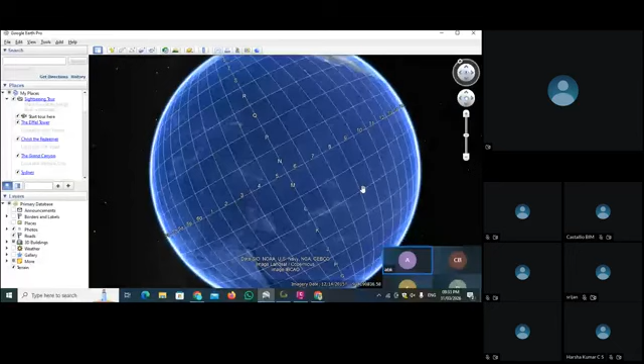So this is our Earth. I like the interface so much. As you work with whatever software, you have to like the interface first, then only will you work longer with the software. So today, what are we going to do? Actually, I made one demo project for you. Here we are going to work with an area.

First of all, let me show you the basic things here. See, when you open your Google Earth software, in the view tab you can see a grid line, or you can use Control L. If I close my grid, then you see the difference here. So make sure that your grid is on.

So we can properly manage our zones. Then there is one part here, you can see on your left hand side. We have to search the area whatever we are working on.

So today what we are going to explore is, like if I have one client requirement, as a client asks me that there is one area, one state highway passing from this end to this end, and I want to check the proper existing alignment. Because as I previously talked, there are two things: feasibility and the DPR report. So all these things are prepared for that work also.

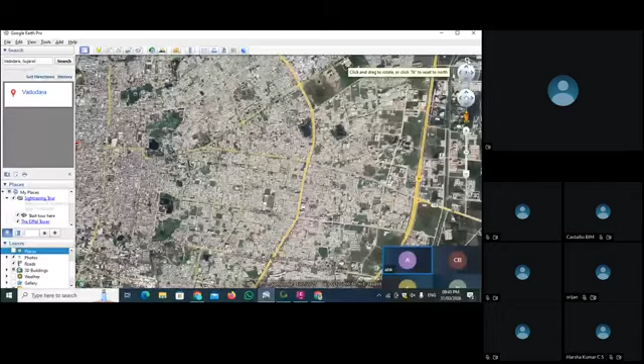We can adjust our eyes with the help of this button. If I click on the N button on the north side, it means the map is proper now. And if I want to explore from the top, I click this, and I can straighten the image with the help of this N button. So now I am properly on top. We can see this image exactly from the top.

Now what we do, we go deeper inside, go deeper inside, and again we adjust our scenario. See, now the first thing, we are using polygon.

If you have this area and you have to develop it, and you want to show the contour of this area, or the surface of this area, to the client, which is attached with this main road and this main road - how can we do that? For that, we can use this polygon. We have to click on this add polygon option.

Here you can see one pop-up. First of all, we have a description, so you can describe all the things you want. As you share this location to the client or your senior engineer, or whoever you give your work to, if your starting is proper and detailed, then in future while working on the same project you will face less problems.

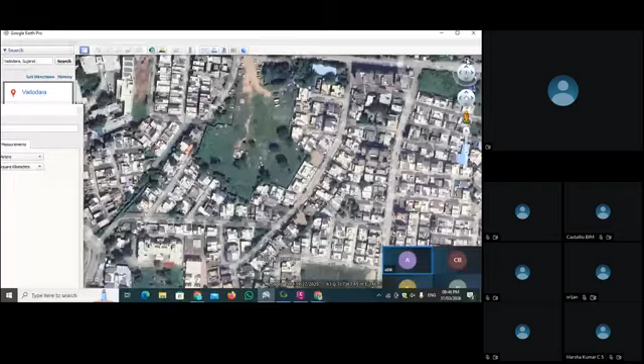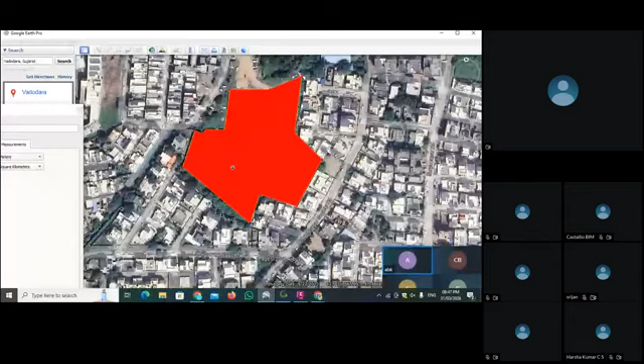See, I am clicking all the border area. You can see all that border line with the yellow color and your polygon in red color. Done. So roughly I identify the area that this is my exact area where I have to work.

Everything is automatically measured when you work with these things. If you want to add an image with this polygon, you can set the image here. You can share the local images taken personally from the location, you can share here. Also you can share a link if you want to share any link with this polygon, and then just click OK. As you click OK, you see your polygon is seen here.

Now what we do is export this polygon, save place as, and we have to understand that whatever file we save with the help of Google Earth, it is in a KMZ format. So for easiness, what I do is save it on the desktop and name the file as Vadodara area. It is in KMZ. Save.

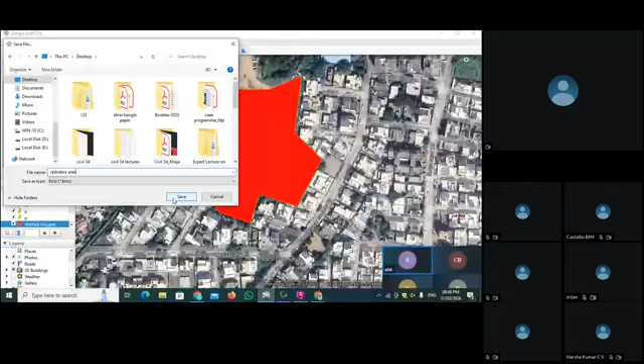See, we have this KMZ file named Vadodara area. Now we use Google Earth. First of all, why am I showing you this exercise? Because when we go to do another deep work, you'll understand the workflow. With the help of this, what we do is create a KMZ file.

Now we create a DEM. We give the elevation to this polygon. Whenever you start your working, make sure we have the zone 43Q. Then you go on Google Global Mapper.

Global Mapper is basically one tool. You can use this Global Mapper software if you want to add elevation, or there are lots of websites also for that. If you search in Google that you want to add elevation in your Google Earth KMZ file, there is online software too that you can use. But if you are new and don't know which software is trustworthy, make sure you use the Global Mapper only, since you are working in the field and know all the things.

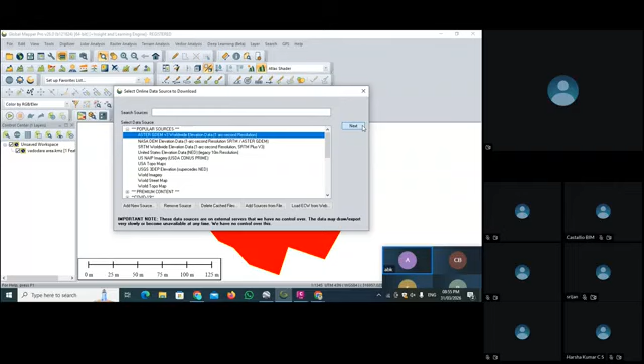See, now our polygon is connected with the data. Now what we do is export this file.

In an elevation grid format. See, there are lots of formats here, so as per your use, you have to select your format. Because I want to give the elevation, I have to select this as elevation grid format and click here, so I have to set it as DEM.

There are so many parts you can select. If you want to use any software after this - we are going to use Civil 3D - so we select DEM. In Civil 3D we have the option to create surface from the DEM. That's why we convert this into a DEM file.

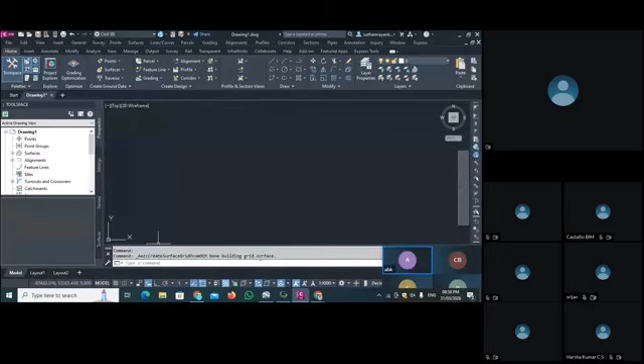Then we go for the surface, create surface from the DEM. On a desktop, we go to the Vadodara area DEM file and open it. As you open it, you can see the command bar. The importing of DEM is done, and it's building the grid surface.

Now our surface is imported, but we cannot see it on the screen yet. So to see it on screen, I talked about this yesterday. Z enter, E enter.

See, we import directly that contour part in the image. You can see all that, because we have a flat area, because we imported a flat area. So this is a flat area, so we can see our contour, these types. An experienced engineer understands the things at once.

Hello. If the contour line is... hello. Yes sir, one doubt is there actually. When you imported the DEM file, did it import only that polygon area or the entire window area of the Global Mapper? Okay, please turn off your mic, I will tell.

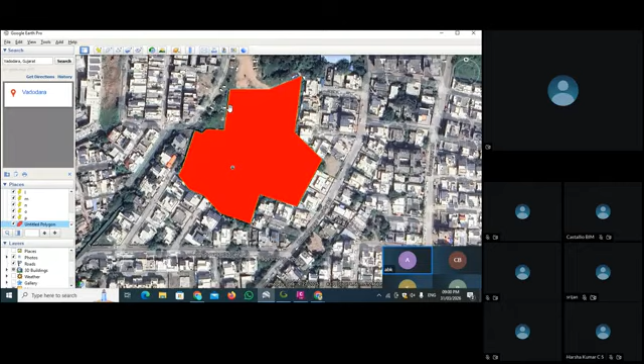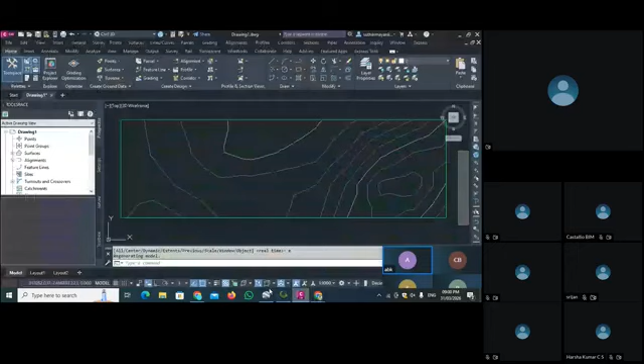See, when we imported the area, what did they do actually? What happened when we create in this part? So what happened here, we have another step, and we show here in Civil 3D. The work changes here because we give the terrain data with this polygon. So whatever you show here in between this screen, all this is imported here in the Civil 3D part. So your polygon is shown here in between. Now how to take this polygon, how to check that polygon, where exactly our polygon is.

So for that, today we are using that image method. This is just the flow that I want to show you. Now the next practice we are going to do is to exactly solve your questions, as we imported it as an image, and we check that image here in Civil 3D with the help of geolocation. So in Civil 3D itself, we take the whole Google Earth into Civil 3D, so whatever we selected in Google Earth, we exactly put it here in Civil 3D.

Okay, so let's start to solve your question. See, if you don't want to see this polygon, you have to turn off this tick, so your polygon goes off.

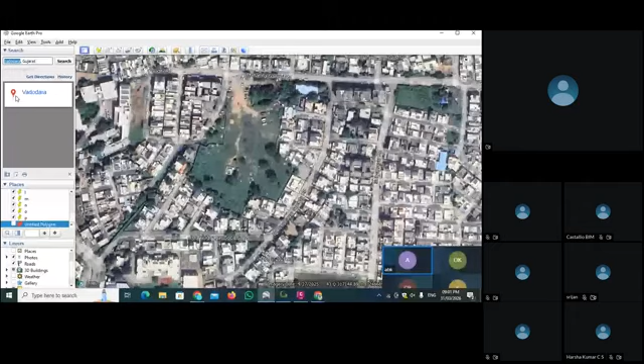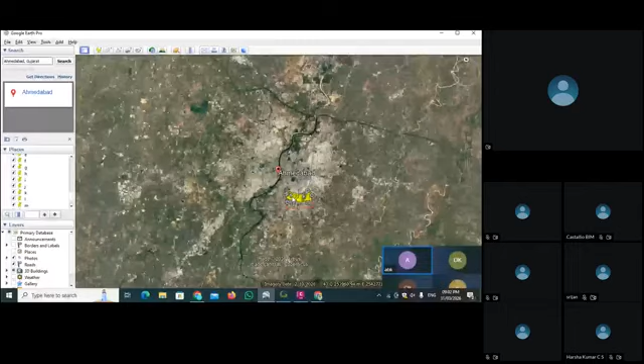Now I search the area, Ahmedabad, Gujarat. See, now what we did here, we take one part, and in that one part...

Just give me 1 minute, I have one call to attend. Give me 1 minute only.

So your untitled path is created. First of all, you have to save this untitled path with a name, Ahmedabad. So this border area will be saved. As a KMZ file, the Ahmedabad area will be saved, this border area.

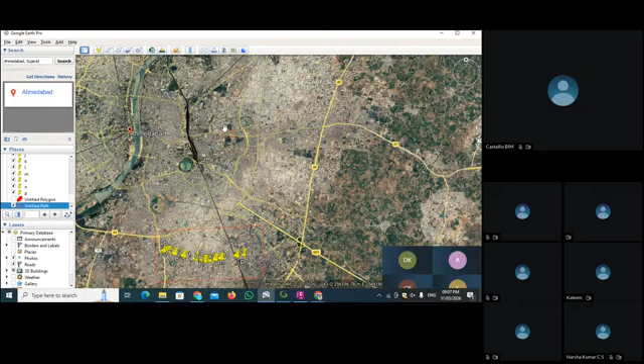Hello, actually your screen is not visible. I will share again. For me, the screen is blurry, I can see but it's not clear. There is some internet issue, I have already highlighted that around 20 minutes back, the screen is blur. Now we can see all attendees, but when you move the screen, the Google Earth is not clearly visible. I think your internet is causing the screen to go blur when you move it. It will happen sometimes because of the internet, but don't worry, when you get the recording all the things will be cleared. So now is it clear? Still blurred.

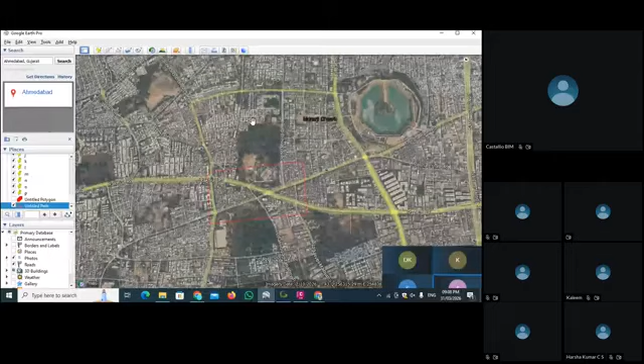So first of all, what we do is create this part and save it as a KMZ file. After saving the KMZ file, we have to take a reference of this road, so I want to export this road.

I use this place mark button. As I start the place mark, click on the add place mark button. You can see a place mark here. First of all, we have to give a name to this place mark. I will give the name as 1, and put it exactly at our road center.

Then we give place mark number 2. As this is a straight road, we give the place mark at a long distance. It is okay, but if you have a curve or that type of thing, you have to give the place mark at a smaller distance to create a proper alignment.

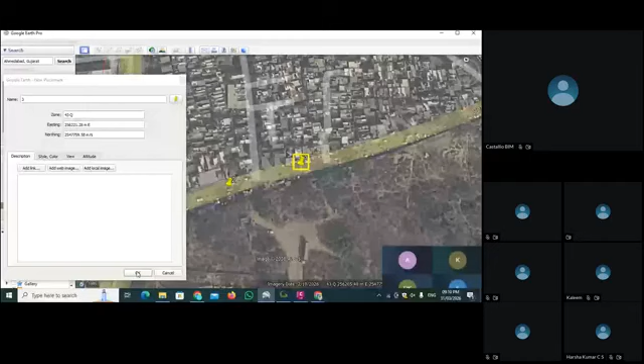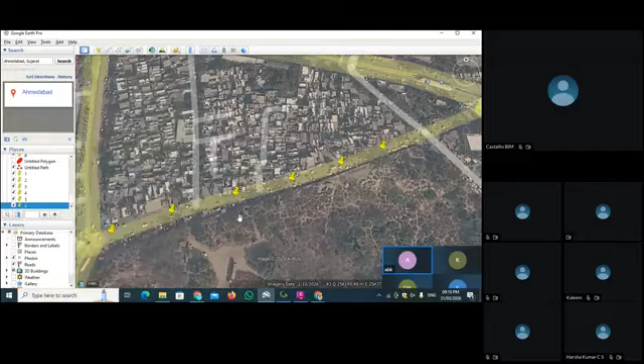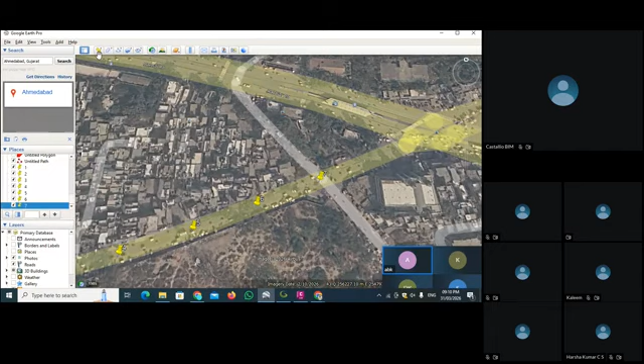Now we go for place mark number 4, then number 5, then number 6, then number 7, then number 8. Now we take a longer distance for place mark number 9, place mark number 10, and place mark number 11. Okay, done.

Now what we do is select one area, and in that area we take one road as a reference. Maybe this will be a road widening project, or they want to mark the road to see the existing alignment, or deliver the existing alignment data as per the proper location. So what we have to do is mark this area, select this button to make sure your screen is properly visible, and then save this part as an image.

So for saving this as an image, we go into file, click on save, and click save as. As you select the save as button, we have some options shown here. From the resolution, we have to take the maximum resolution and then save the file at the place.

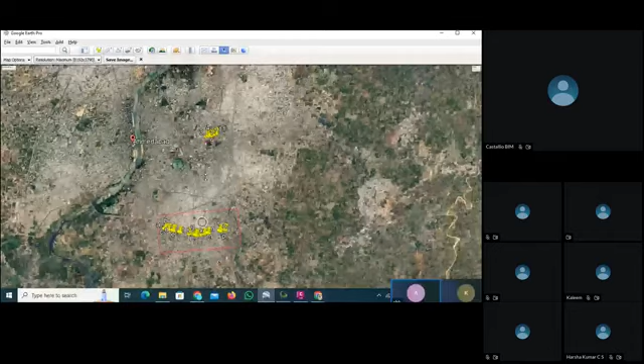So to save time, what I did is complete the same process here already. You can see I completed the same process here. First of all, I created the closed path, and in that closed path I took this route.

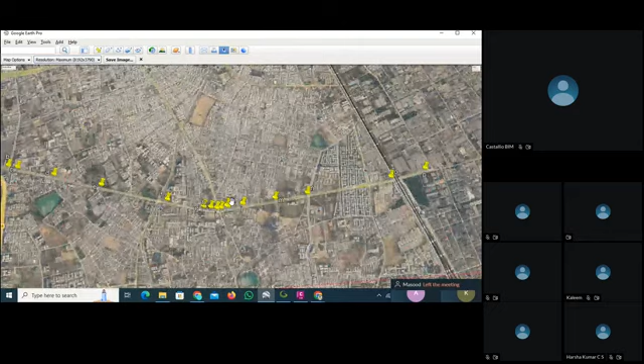As this route has some curves, I chose so many place marks here to manage the curve, so we can see the exact thing in our Civil 3D software.

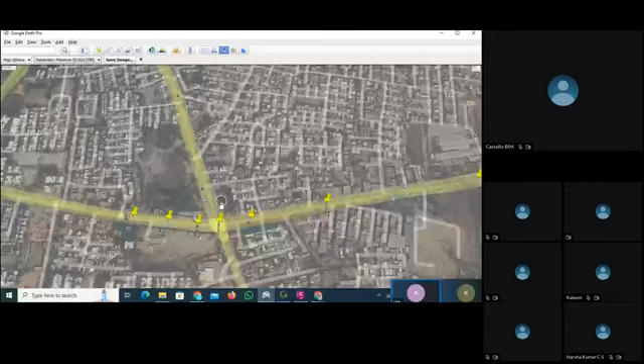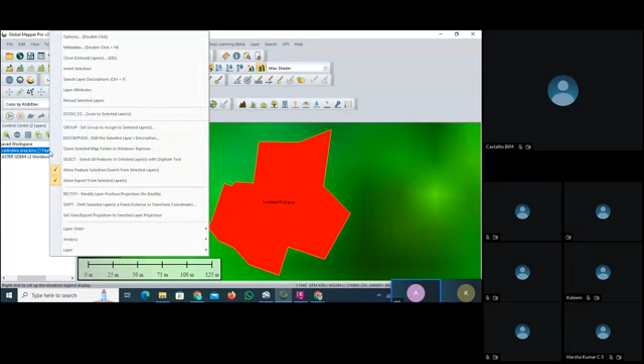Once you did this, you have to go into the Global Mapper software. Now the Vadodara area, we are not working on it because this is just for practice, so we just close this layer. You don't have to start Global Mapper again and again. If your terrain data is the same, just close the previous one and import the new one from file, open data file.

Now, see, this is the image that I saved previously, and this is the KMZ file that we created when we made the first closed path. So first of all, you have to create your closed path, then save it as a KMZ file. Then you have to add the place marks and save it as an image format.

Okay, now the work of Google Earth comes in here. First of all, I show you the image here. This is the high definition image. See, you can see the red line here, the closed path you can see here in a red line.

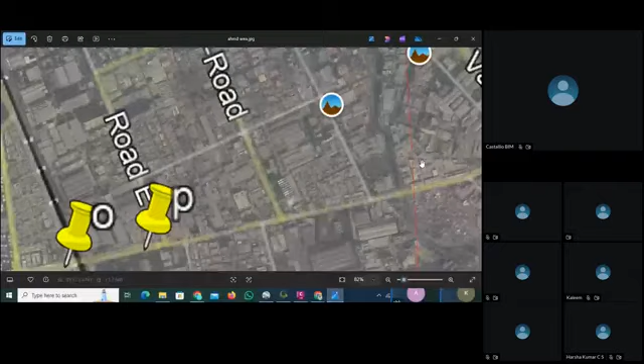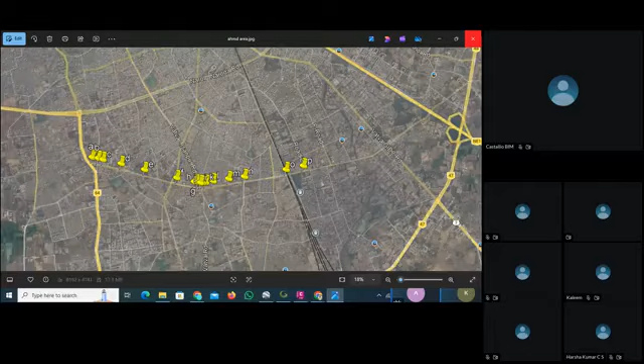And the place marks we did on that road, which is straight, curve, and goes straight again - this is the old place mark. We took an image, and for saving this image it will take 10 to 15 or 20 minutes. So I already saved this image and saved this KMZ file format, as previously I showed how to save this KMZ file.

So before creating all these points, when you just create your closed path, you have to first save the file in KMZ format. Then you have to use this place mark wherever you want to place it, and then save this as an image.

Once you complete these two things, you have to go into Global Mapper. In Global Mapper, you have to open that closed path. See, we open the data file - in our lecture number 2, we have this Ahmedabad area.

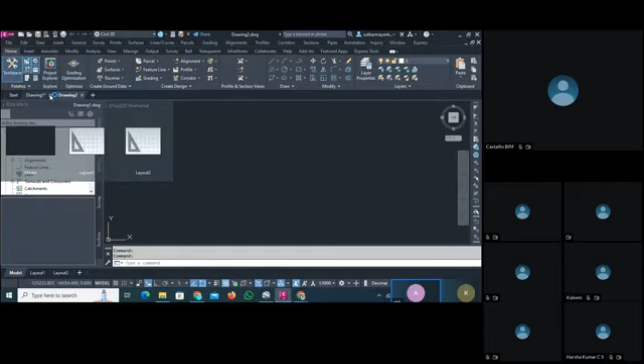We... and in Civil 3D, okay.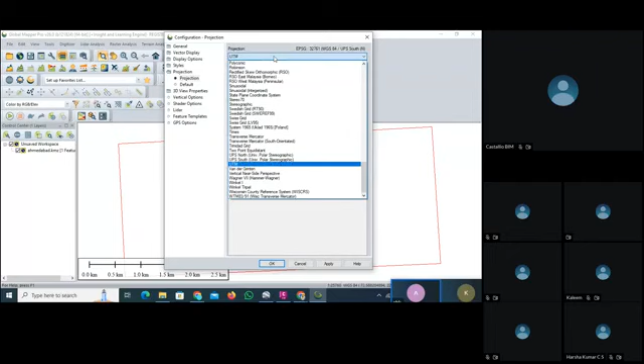See, this is the area that we selected in the Ahmedabad region. We open this file, so the closed untitled path is here. Now the two things we have to set are the configure as UTM.

So the exact thing we can import here. Now once you did the things, you have to save this file in a format with the help of Global Mapper. I already showed you how to export the file. You have to go in file, export the file. First of all, you have to export the file in elevation grid format as a DEM file format.

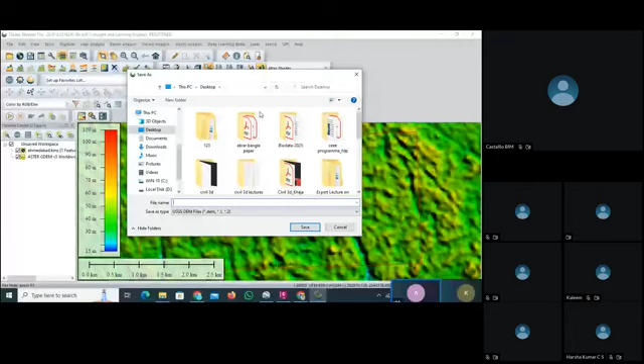Okay, as a DEM file format you have to save this. Once you see, okay, now put the name Ahmedabad area and save it. So as you save, you can see your DEM file Ahmedabad area here. I save this file here.

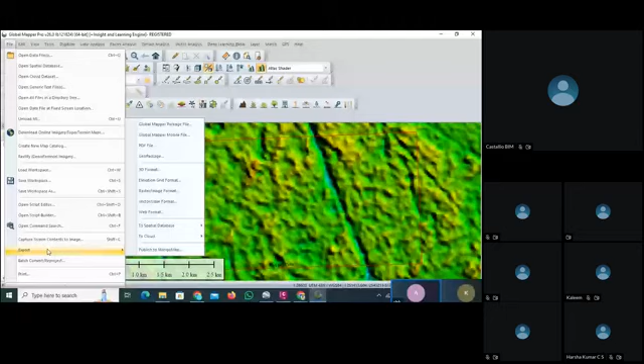Now we have to save the same file in a DXF format. So again, in Global Mapper, we go in file, export this file as a vector lidar format and set it as a DXF. Okay.

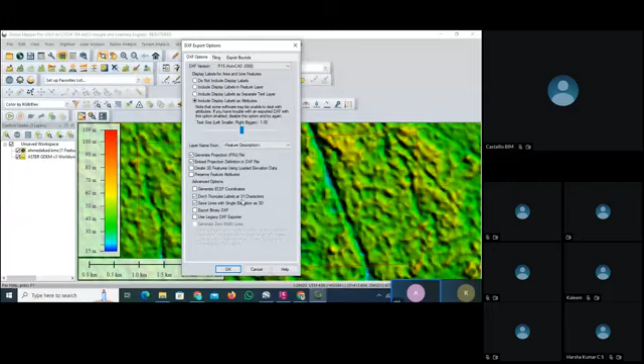You don't need to change anything, just make sure that the projection file is ticked and the DXF projection file is ticked. Here in advanced options, these two things have to be clicked, and here DXF version 2000 is perfect. No tiling is required, and all loaded data is as per the drawing set. Now we see OK and save that Ahmedabad area here in our file day2 as a DXF file area.

Okay, so we exported two files from the Global Mapper.

Now let's see what we did. First of all, we start Google Earth. We select an area and give it a closed path, and we save that closed path as a KMZ file. Then we imported this KMZ file in Global Mapper, set all the things as per requirement, and then exported that file as DEM format and DXF format.

Make sure once you created this KMZ file format, then you have to place a mark and save that mark as an image. You can save that image with the help of the file menu, save, and save image option.

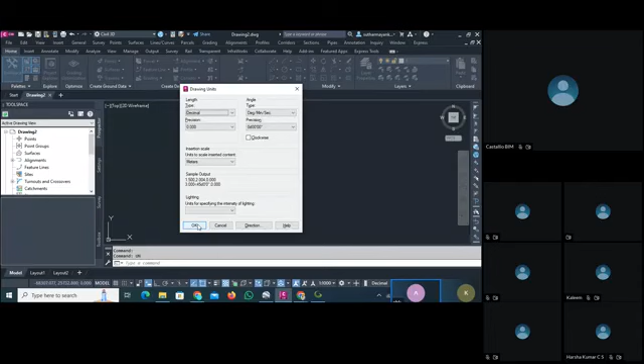Then we have to go here in settings, right click on the drawing and say edit drawing setting. In edit drawing setting, you have to set your units and zone. As we have the zone 43Q, we have to click OK 43. See, we have 43Q. So we select here our zone.

Even if you don't understand from Google Earth, what you can do is open the Global Mapper software and when you set your projection, as you select UTM, you can see your zone here, 43. You can see your datum here, WGS84. So when you practice, take your hometown area, and you can understand in which zone you are living, in which datum you are. So you can select that datum and that zone.

So right now I am in a datum of WGS84 and our zone is 43. So in Civil 3D, we select the same zone.

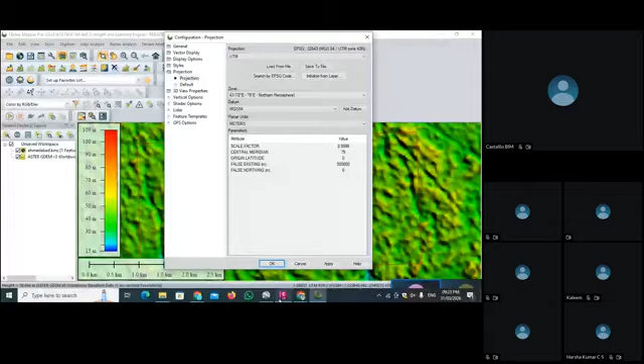Sir, WGS84. Hello, hello. Yes. Yes sir, I have a doubt. In Civil 3D, on my computer, the zone is not shown. So how to activate the zone setting?

Try to reinstall the software because this is an automated process. If your software is not installed properly, you can face this problem. And there is one setting from file - that server setting. So if your server setting is not good, then also this problem will happen.

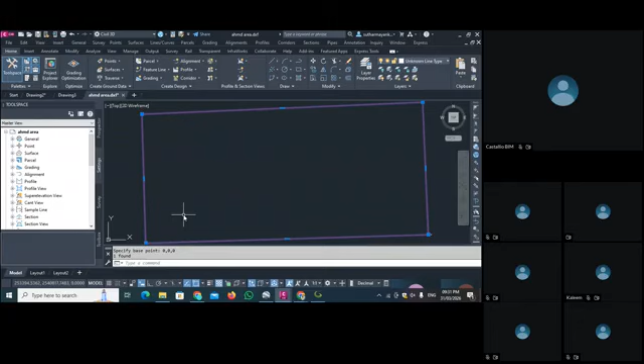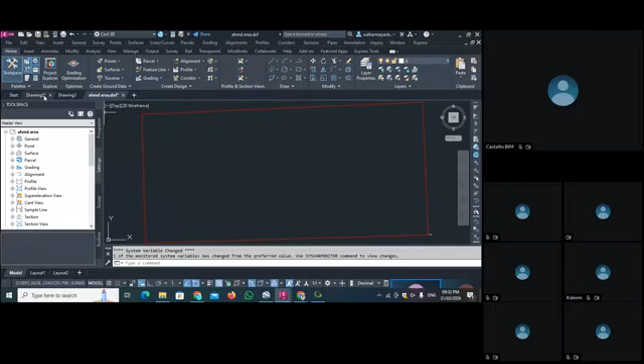Now we come to our main file where we imported our DEM surface. Here we have to paste that option. For paste, we type PASTE. As we select the copy base, we have to paste here using paste clip. As we click on paste clip, we set the coordinate 0, 0, 0, enter. See, this red border area we copied from here and set it pasted here in our contour.

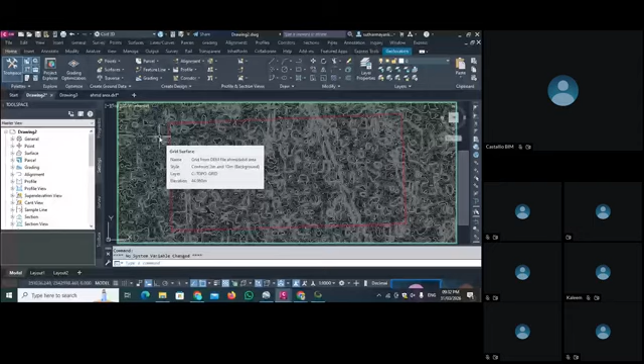Sorry, one of you asked a question about when we imported things from Google Earth to Civil 3D, whether only that part comes or the whole part comes. Now you understand what we import, what we click on the part, and what image we saved, so all the things come as per we are working. This is the first step we do.

Now what we do is attach that saved image here. Remember we saved one HD image, so we have to take that image here too. For that, we have a command named IAT. As you type IAT, you see image attach. As you click on image attach, it will direct you to the folder. So we go to that folder, day 2 training, and this is our image, we have to take it. We open this file, and it shows your coordinate is set at your path, scale, and all that. That's all good, I'm saying okay.

Now what we do is click here and set that image here. Now your image is shown in Civil 3D software. See all these things, your path, your place mark, your red path here, you can see all that clearly. As you zoom this image, you can see your red path clearly. This is the magic of that HD image.

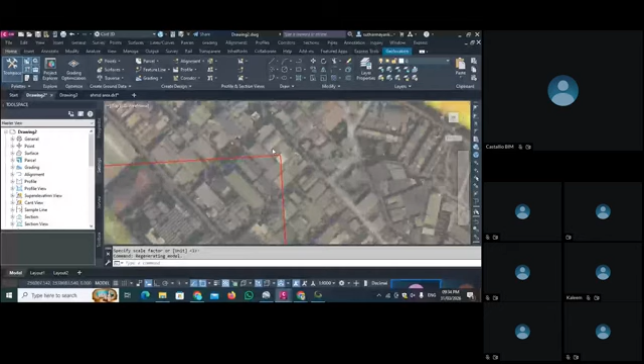That's why it's important to set your image in HD form only, because if you set any other resolution, then when you zoom it here in Civil 3D, you cannot see properly what you imported. Okay, so now almost 80% of the work is done. So now what we do...

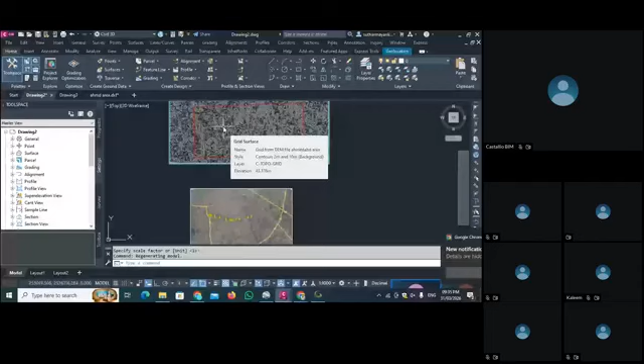We want to take this image from here to here in our contour area. For that, we align this image, we align this red path with this red path in the image. The red path we have in the contour and the red path we have in this image. So we select the image and type the command ALIGN, select OK.

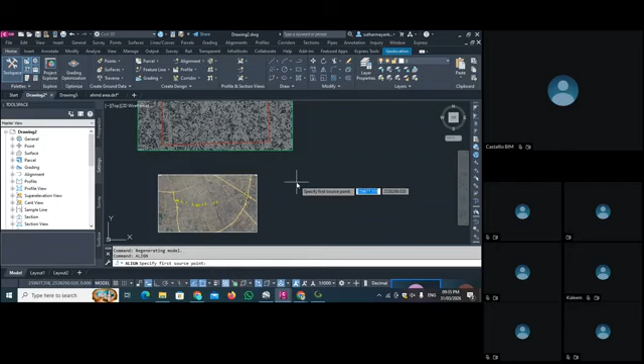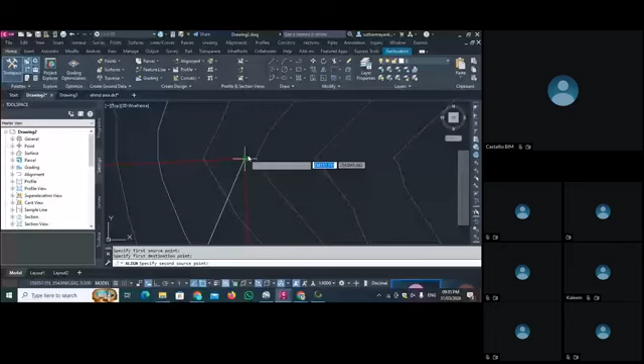Now check here, it says specify the first source point. So we click on the first point here in the image, the first corner. We click OK on the first corner, and the same corner showing here I select as OK. Then we select the second corner here, search for the second corner, select it, and then select our second corner in the contour, select, then press enter and say yes, scale the object based on alignment point.

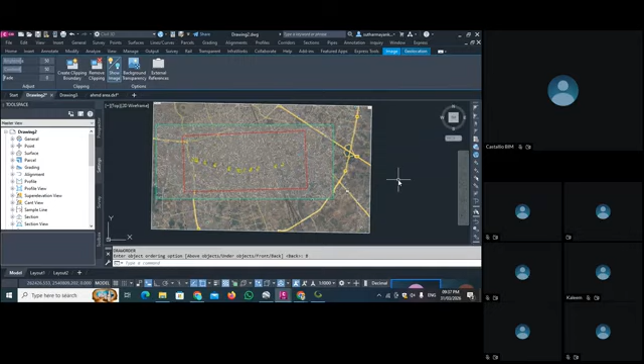See, as you say yes, your image is set in our system from here to there. If you click on the scroll button, you can see now your image is upward, so we have to send it to the back side. For that, we select the image, then type DR, enter, draw order, and set it to back. Now your image is in the back side. You can see your DEM file and you can see your contour here.

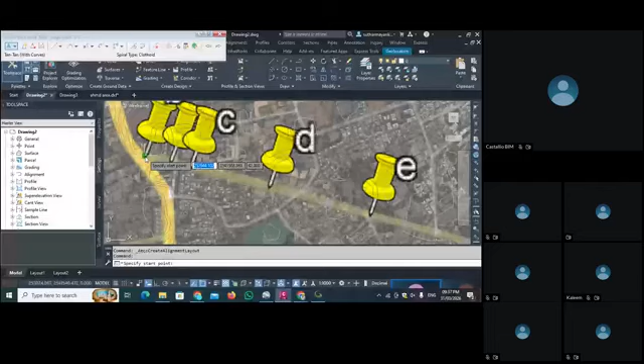Now what we do is click on this part, and I'll create one alignment here. Right now you don't know the alignment things, so don't worry about it, I'm just creating one alignment. I'm just clicking on the button, placing as a place mark, clicking all the place marks as it is.

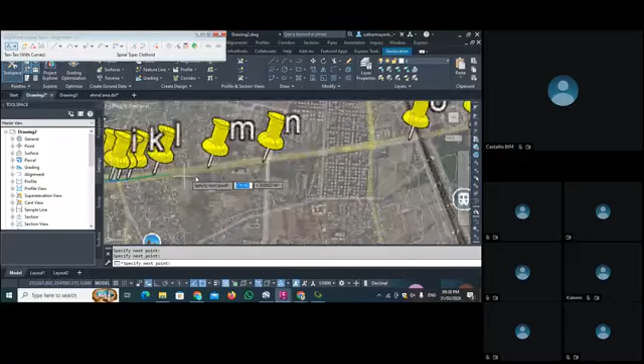I'm clicking at our place mark. So our contour is on, that's why it directly picks the point of the contour, but it is not a big issue.

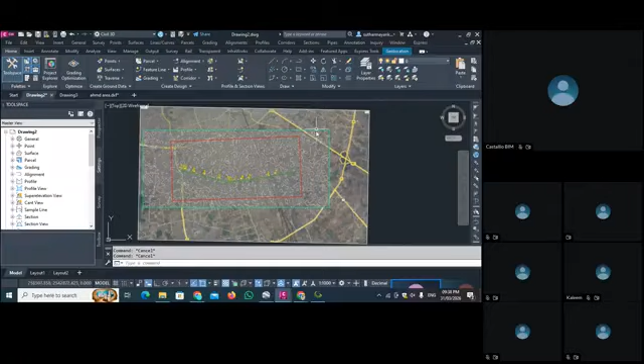I take one point here, don't worry. Then I press the escape button, so your alignment is ready now. As you click on the middle scrolling button, your image hides and you can see the new path. You can select the contour and all the things. Now we delete this image, we select the image and delete it.

Now we import all the work that we did here. I want to show exactly what I exported from Google Earth and imported here in Civil 3D, so our workflow is right, and that we exported all the points in a proper manner or not.

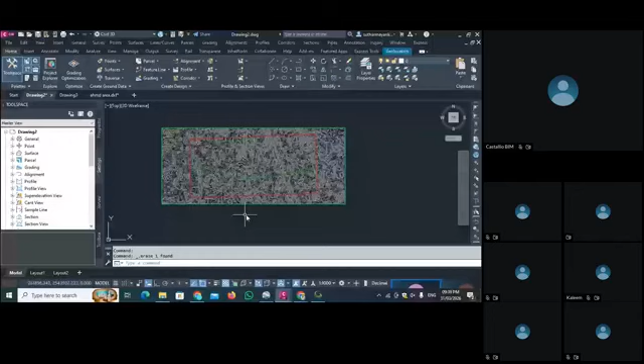For checking that, we go here in geolocation. From the geolocation, we have this option named map. We have to turn this map on in aerial mode. As we start our aerial mode, you have to wait for some time as it will take time.

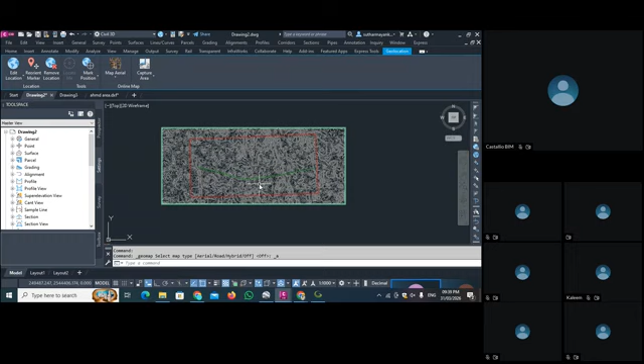See what I do. I have a surface. I change the surface style, surface properties, no display, border only, apply. Now I remove that contour, I just show the border only. This is the area where we worked. We take the area from here, place all the points exactly, and create our existing alignment exactly where it will be.

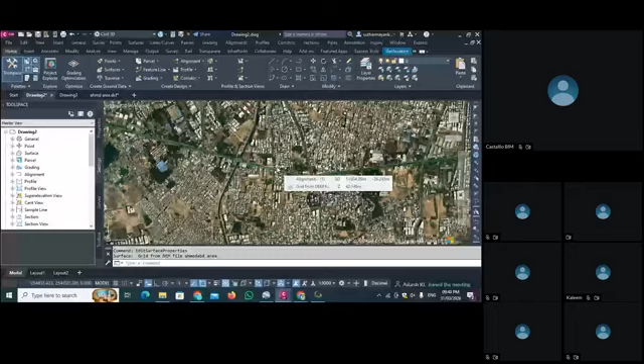I hope you understand this whole process. When you open this geolocation, it will take time because it works based on satellite data and internet use, so it's not a big issue. I hope you understand this workflow, how we imported the exact location and existing road in a Civil 3D project. Now again I turn off this geolocation.

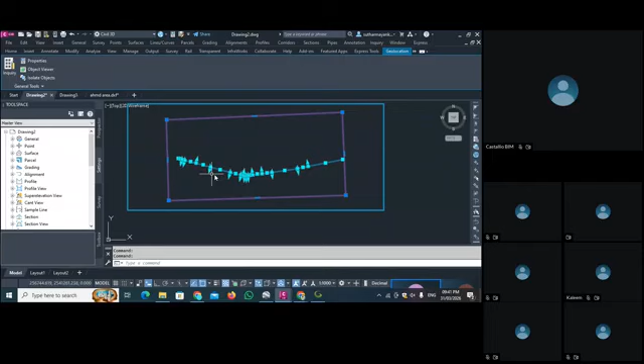So this is the area that we see on the screen. This is the red path that we created, and this is the alignment that we created based on our placemark. So this is the first path we covered.

In our previous session we saw how to import the points. I hope you understand the first thing I taught you. Now I open a new file. Today I will show you the process of importing a point in a different way.

Understand one thing: when you import your point with the basic point setting, we go from the point creation tool menu, import point, click here and import our points. This is step number 1. In the second step you can import your point from here. Since we don't have any point, you cannot see any dot mark or plus mark, so there's no point inserted here. You can also import your point from here. This is the second process.

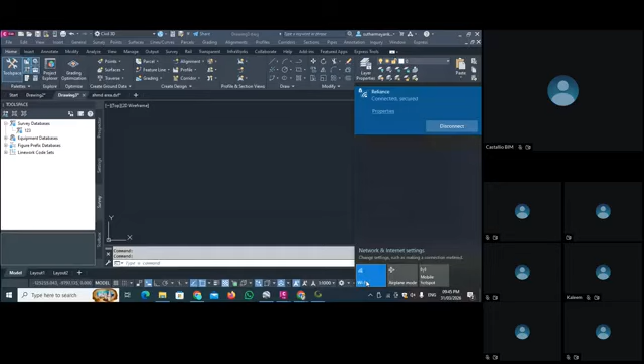Hello, any one of you please confirm that. It's visible, sir. Yes, sir.

Okay, so what we do, we use this survey part. Mostly you cannot see this importing option anywhere, because people who have much experience or who are already working with the software for long are using this type of different things. I'm showing you all the things, don't worry about it.

Whenever you go for an interview in a good MNC, they will be impressed with your work and they won't ask too much. They understand that this candidate differs from the hundreds of other candidates coming for the interview, and your chances of selection will increase.

So what does survey database do? Survey database creates a folder in your computer. So whatever you save, all that data is saved in your computer, not in your AutoCAD file. So when you are working in your AutoCAD file, your file is only 2 MB, 5 MB, 10 MB, 15 MB. When you import the points in a simple way, your file will become 1 GB, 1.5 GB, 2 GB, 5 GB, 7 GB. So this is the beauty of this survey database.

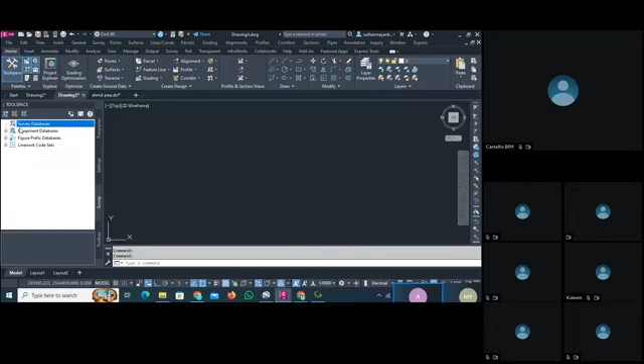Sir, cursor is not moving. Hello.

Now you see your pop-up here. Again, I'm doing this. As you click right click on your new local survey database, you see a pop-up here. Now you have to put your name.

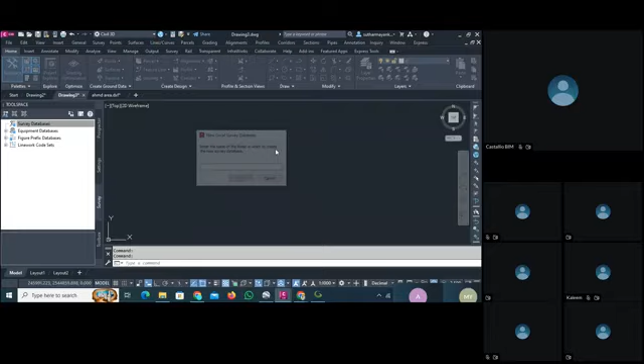Is the screen visible? It's not visible, the screen is stuck. Okay, don't worry, don't worry, don't worry. I hope now it is okay, visible. Yes, sir, now move the cursor. Yes, yes, now it is.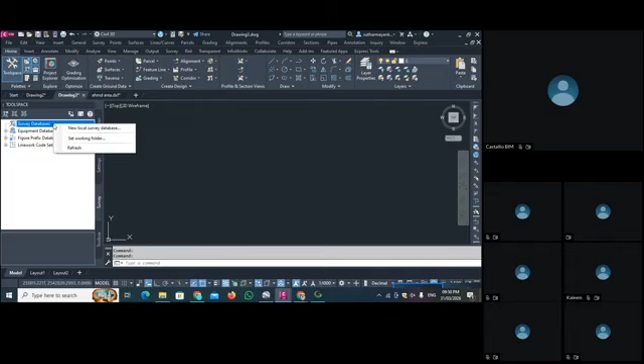See, so as we create our folder, we go to new local survey database. The pop-up opens. We have to give the same name, day 2. We say OK here. Now you see your survey database is created as day 2. So we have all these things: you can import the event, survey queries, network, figure group, and all that.

Now what we do here, in import events, you can click import survey data. As you click on import survey data, you can see a pop-up to specify the database. So you specify the database: as you see the database is day 2, you select it and say next.

Then specify the data source. So here you see field book file option, land XML file option, point file, and point from drawing. Whatever data you have, you can import it here. Right now we have a point file, so I'm selecting the point file. If you have the land XML file, you can import that point here. If you have the field book, you can import that also here. If you want to select points from the drawing, you can also select or complete the work by choosing this file.

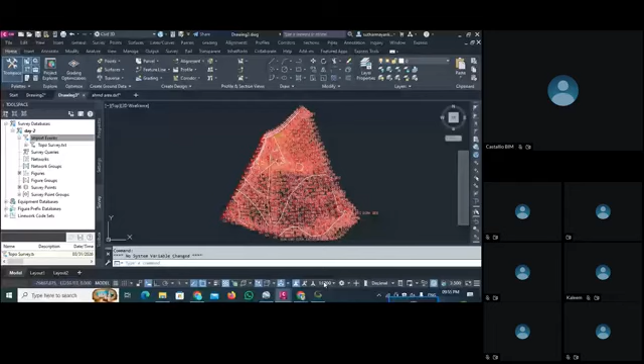See, now you can see this, very rough. So for that, I set my scale with the help of this scale option. I set it to 1 to 250. Now you can see.

We have one area, we have one existing roadwork - this is our existing road, this is the plot boundary, there is one house, and this is the area that we are working on. This is our line set created with our point set.

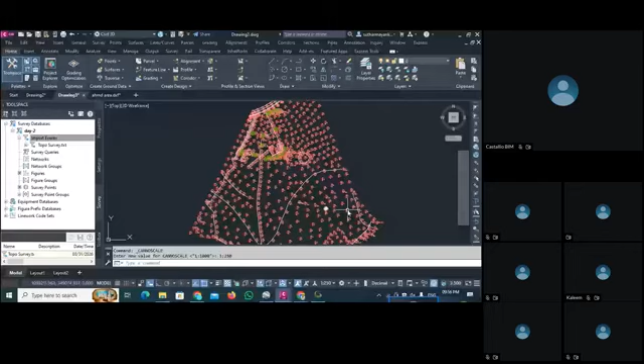Now, if you don't have your line set, what you can do is come here in the line work code set. See, I have a plus icon because I have 2-3 line sets created here, but if you don't have any line set, it will be empty. So you select 'new' and give the same name as we gave before. When you select OK, there is something to set.

See, there are special codes here - in beginning, set it as BEG. For continue, it's set as C. For end, it's set as END.

Sir, same issue, facing screen is stuck. Cursor is not moving.

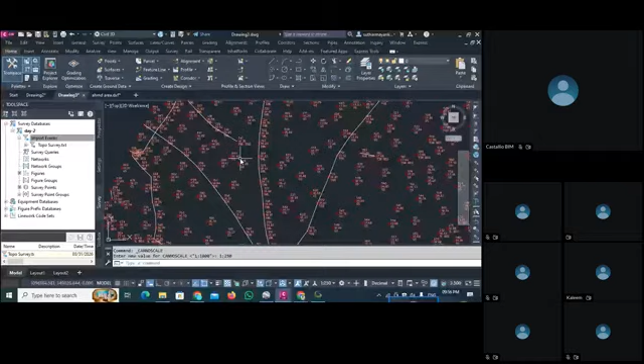Hello? Hello, yeah, am I audible? Yes, audible sir. Meanwhile you reshare the screen, just one quick question.

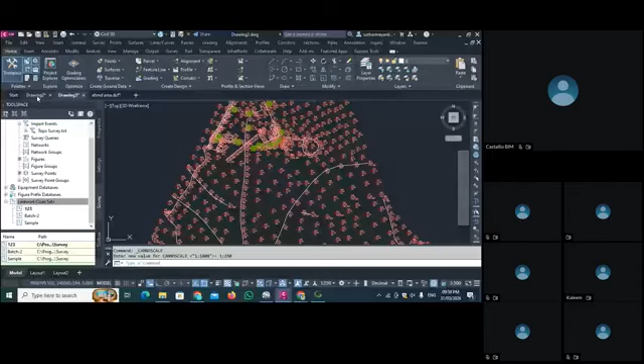This point file, I think this is different from what we generated from Google Earth, right? So is that topic finished? I'm just a bit lost because we were generating some image and all - now we got the points, but we never had a point file there, right? So this is a different file, no? Actually, yeah, this one - I was talking about this one.

Okay, actually the first part was importing the exact location from Google Earth to Civil 3D as per the topo location, and checking whether we imported the exact same path or not. This is the first topic, and that is covered.

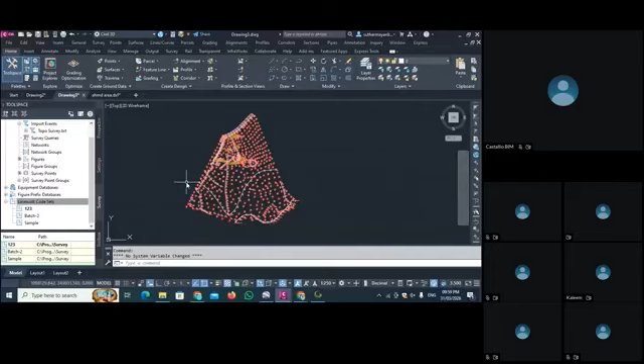Okay, so this topic is closed now. Let's talk about the new topic: how to import your points with the help of the survey database, and how to create the line work.

If you don't have a line code set, you have to create your new line set here. So create a new line set and give it the name Day 2.

Now see, special codes are here. In the beginning you can see BEG here, and in a continuous line you can see C, and for end, END. So this line code we have to set. I already set all that here, so just say okay. I will show you from where I got this and all that.

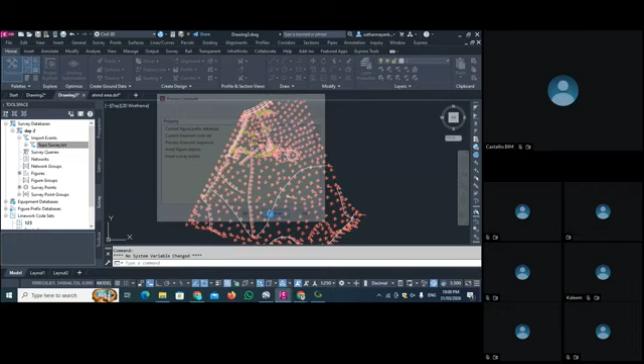So now I have this Day 2 line set. Now, in our imported point, we imported this topo. We click on Process Line Work. As we click on Process Line Work, whatever new folder you created, as I created Day 2, you have to select Day 2 from here and select OK.

So your line work will be shown. It is easy, not a big task. Now I will show you another thing.

See, if I'm going with Civil 3D - just give me a moment, I will show you all the points in Civil 3D.

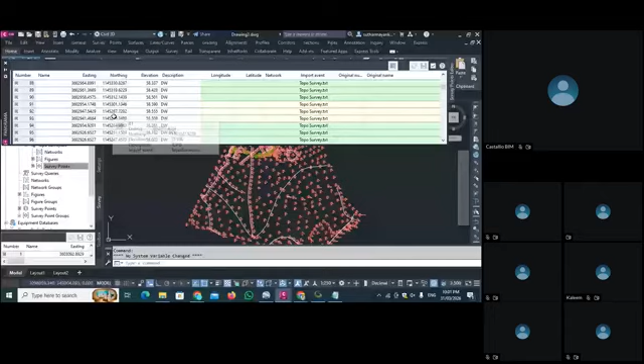Okay see, so it's important that you know how to create all these points. If you have all these points, you can check the topo point from here as well. You can check your point from here - this is your survey point. See, this is all your points. You can check from here also.

Also, you can import things from here. Now in Day 2, you can go into properties. See, now we imported this file, the topo survey file. In the topo survey file, we have to go into properties. In properties, there is one name called file, so you can directly check all those points from here also.

See, I click here, I can directly go through to our topo survey file. Or else, wherever your folder is placed - see, in my computer this is the file I have - I can also check it from here.

Now you understand that if you have the point, you have to know how to create the sheet. So I will show you how to create and import the sheet. We have to select all those points, then I am importing one Excel file.

Okay, give it the name 123, whatever. Open your Excel file, paste your point here. As you paste your point here, it is all shown in column A only - see, column B is empty, column C is empty. So what we do, we go into Data and convert it into columns.

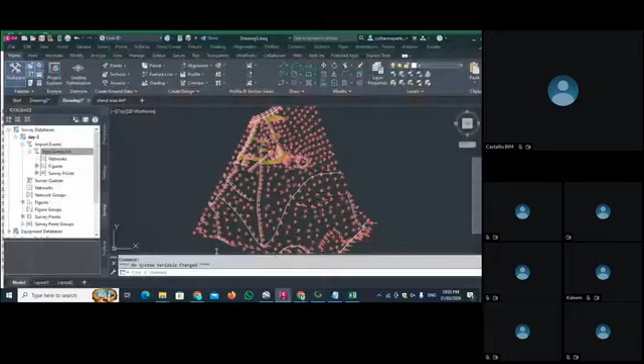As we are seeing here, when you set your simple line code, make sure here in the beginning you set BEG. So whatever point file name your surveyor team provides, you have to set that name here in starting, in center, in end, and all this name you have to set as well, and all done.

So now you see your line type here. This is the process how you imported your points with the help of this survey tab. Now we are looking at the point group.

Point group is a very important thing. As you saw, we have lots of points named TOB, SWL, BLD, ESHB, BEG, EP. So we have a lot of points, so we have to create each point group to make our work very easy.

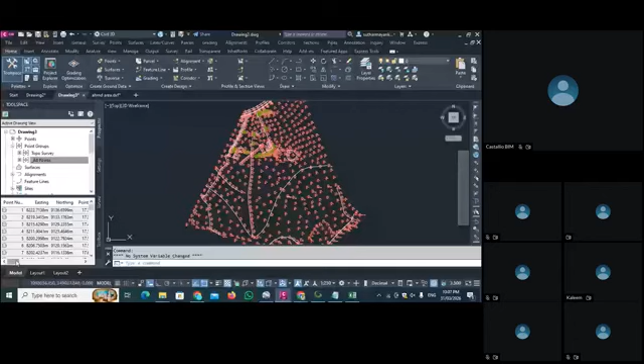So for that, what we do is come here in point, we go in point group. Already we have a topo survey that we imported, and Civil 3D itself creates a point group, all points. So now you can see all points here also. There is our point EP, named EP.

So what we do, we go here in point group, we create a new point group. For example, I will create a point group named building.

This is the style, point style. Civil 3D itself gives a lot of point styles. You can edit this style by edit current selection. You can change the name, you can change the marker, you can change the geometry point, you can change the display on and off, and summary, all the things.

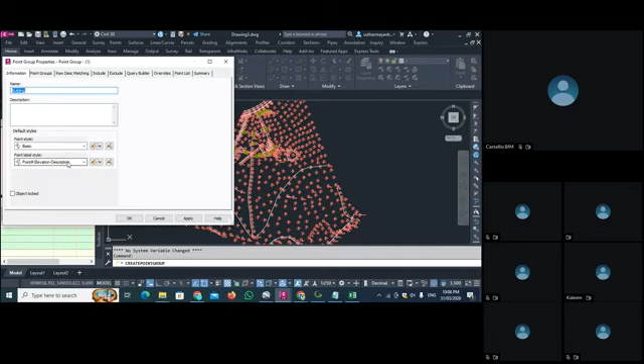You can set a point label style to see the point style and point label style. These two are different things. Point label style is showing the label that I want to work with, and point style is showing how my point looks like.

You can create your new point style also. You can copy the current style and edit that style. You can edit the current style also. You can pick from the drawing and select the new style name.

So first of all, I give the name as building. Then in point group, you can see only 2 point groups here. We are creating this building as a new one. In raw description, you can see only 3 codes here. So if your code is not showing, you have to create your own code.

I will show you the 2 methods to create the point group. First of all, I have only STA, SWMH, and TR - these 3 point groups only. So what we do, first of all, we create a point group. As we click on the topo survey, we have one point group named EP.

So we go in setting. As we know, in the setting tab, setting is for design check, set guideline for all the things that we worked on in the prospector tab. So we go in points and we go in description key set. We have one key set given by Civil 3D.

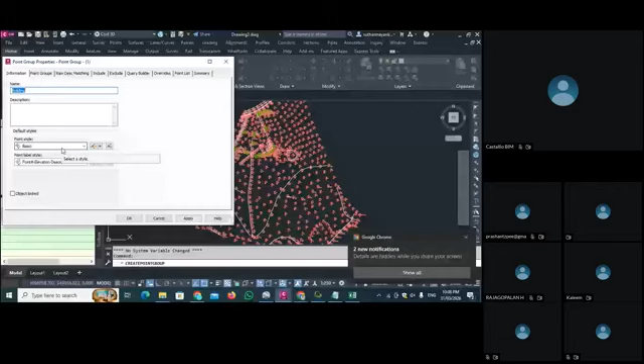What we— screen is not sharing. Hello, our screen is not sharing, sir, it's not visible. Can we continue this tomorrow, because it's already 10 p.m. now. I think it's more than 2 hours, it's getting quite hectic actually.

Okay, yeah, because two hours is too long, right? Don't worry, so today we keep it to this. Tomorrow we will start from the point group. Don't worry. Okay, thank you so much.

And sir, today no one shared any doubts with me, I think you didn't practice anything. No, it's not like that. We can have a questionnaire, we can stop 15 minutes early. If it is 2 hours, we will start and at 1 hour 45 minutes let us keep a 15-minute questionnaire before the 2 hours time. That will be good.

Okay, yeah, from tomorrow I will keep this in mind. And still, if you have any questions, you can share the question in the group, or message me personally, because I'm free all day tomorrow, from 9 to 8 I am free. You share me the doubt whenever I'm free and I will solve your doubt, don't worry about it. Thank you.

So as we have to cover all the things in 5 days, so actually this is...